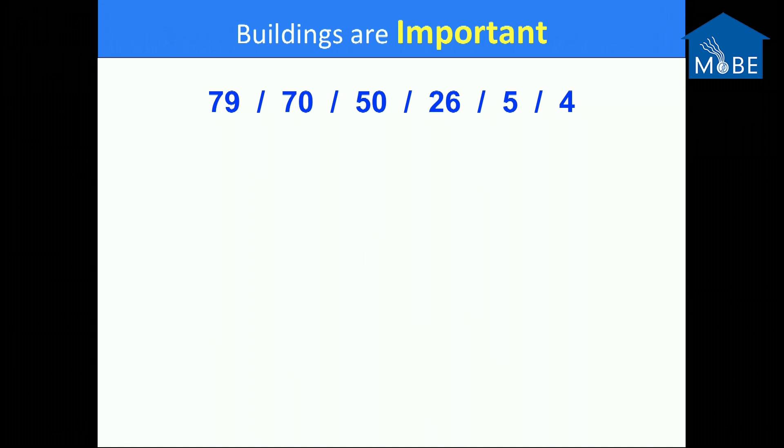So, some of you have seen me say this before, bear with me, but I'm not going to ask you what these numbers mean, I'll just tell you what they mean. Buildings are really important. The average American lives to be 79 years old. The average American spends 70 of their 79 years domiciled inside buildings. We spend more time, a greater fraction of our lives, inside buildings than whales spend submerged below the surface of the ocean. Think about that.

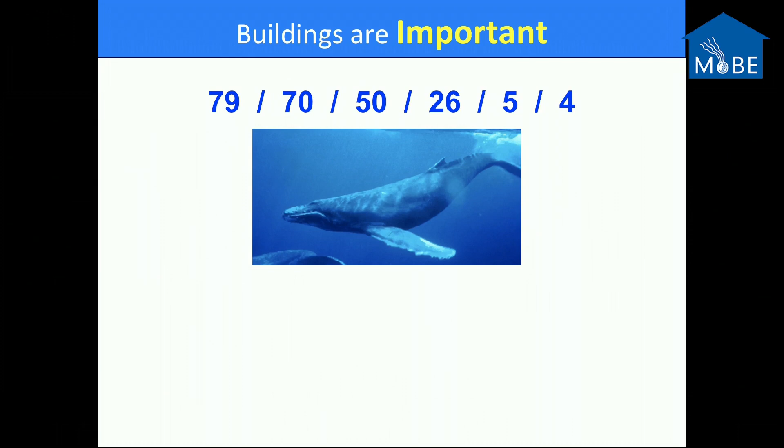Buildings are our ocean. We spend 50 of our 79 years in homes, 26 of our 79 years lying horizontally on a mattress with our face pressed up against a pillow, 5 years outdoors and 4 years in transit.

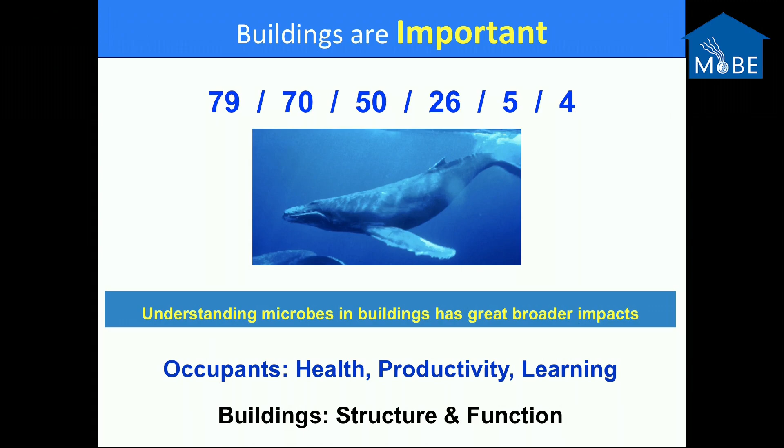So understanding microbes in buildings, I think, has great broader impacts. Definitely impacts the health of humans. We know that from hospital-acquired infections and lots of other things. Affects productivity, affects learning, but also affects the building. Rot affects structures, right? Biofilms growing on heat exchangers and HVAC systems affects the energy efficiency of buildings. So microbes do a lot to occupants as well as the structures of buildings.

Buildings are also complex, right? So I think Jeff Siegel said yesterday, if you take a measurement of temperature and relative humidity in a living room and you call that the characterization of environmental conditions in a building, you're just wrong. In fact, you should never get federal funding again if you say that. Buildings are extremely dynamic. Changes occur in buildings on the order of seconds when HVAC systems cycle on and off, to decades in terms of oxidative aging and other types of aging of materials.

They're heterogeneous, right? So if you just look at temperature on the plot up here, you have temperatures in attics in the summertime in Austin, I measure this in my own house quite frequently, up to 60 degrees Celsius. And you have supply ducts running through the attics with air in them at 13 degrees Celsius. Across less than a millimeter thickness of HVAC duct, a huge gradient in temperature. And you see that all over the indoor environment.

We see gradients in relative humidity, in illuminance, in daylighting, in materials, discontinuities in materials, in air speeds, in pressure across these spaces. And those pressure differences cause airflows that carry stuff from point A to point B. Daylighting's interesting. We get these steep gradients in space, but also in time, right? And if you've got a material that's in a lit zone with daylight, those materials can become very, very warm, especially if they're dark materials.

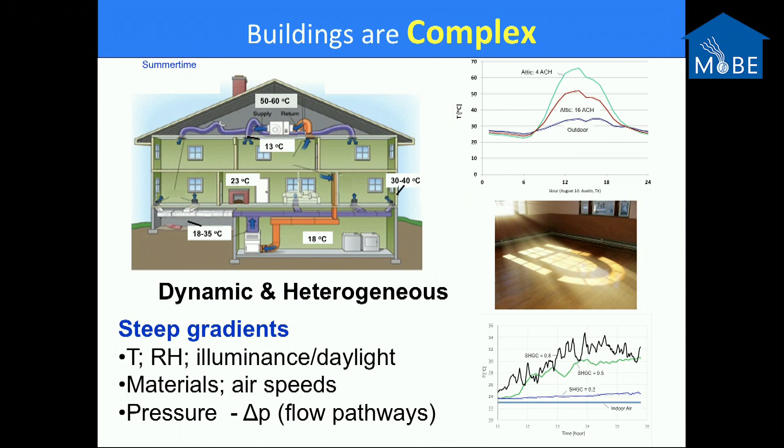Buildings are also deceiving. So I've done analyses of my own home. If I count the garage, the crawl space, the attic, and wall cavities, the unseen, or at least the unoccupied portion of my home is about the same volume as the occupied portion of my home. My entire home is about 50% unoccupied, right? So there's a lot of spaces in buildings that we don't think about because we don't see them. These unseen, unoccupied, hidden spaces, wall cavities, crawl spaces, attics.

I have a colleague, Attila Novoselac, J.P. Maestre, who's here, I believe, Kerry Kinney, who are doing interesting work in portables, and they see these small pressure differences, minus 2 pascals to positive 2 pascals, and they can see the microbiome of the attic being injected into the occupied space or the crawl space in the occupied space under negative pressures, and then you reverse that with positive pressures with really, really small pressure gradients, right?

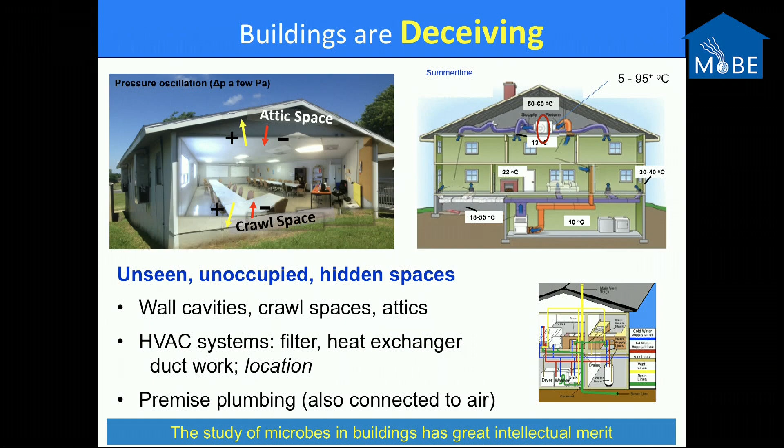HVAC systems are really understudied, in my opinion. There's lots going on in those systems, including heat exchangers that get up to temperatures of 95 degrees Celsius. So these are really extreme conditions in a building environment, and as low as 5 degrees Celsius. And then I'm not going to say anything about premise plumbing because I know that Amy's going to say that right after I speak. But the study of microbes in buildings, I think, has great intellectual merit just because of the complexity of buildings.

Buildings are prone to human mistake, and this is following up on something that Richard said about schools being pig pens or something like that. I don't remember how he said it, but I do a lot of work with schools, some pro bono, some research in Central Texas, and I see these kinds of design features.

See a lot of big external steel support beams with ceiling tile butted up right against them. There's 25 little humidifiers in every one of these classrooms that eject a lot of moisture to the air. And when this beam gets cold, very conductive surface, when the outdoor temperature drops, you get a lot of condensation on that cold beam. And when you butt ceiling tile right up against it, you get wet ceiling tile. And every single school I've seen that has this design has exactly that. We have growth right here along the external beam.

This is a school that has a downspout with a bunch of piles of leaves next to it and an air intake about 6 inches off the ground in this school. This school was closed for 2 years because of mold problems, and 2 teachers went to the hospital with respiratory distress. Cost about $5 million to remediate this building.

Here's a school that has a downspout that goes right into a drain that goes underneath the building. A colleague and I went underneath this building. It's a swamp down there, and the water was wicking up the walls, and this part of this building had to be closed and remediated. These are just dumb design features of buildings.

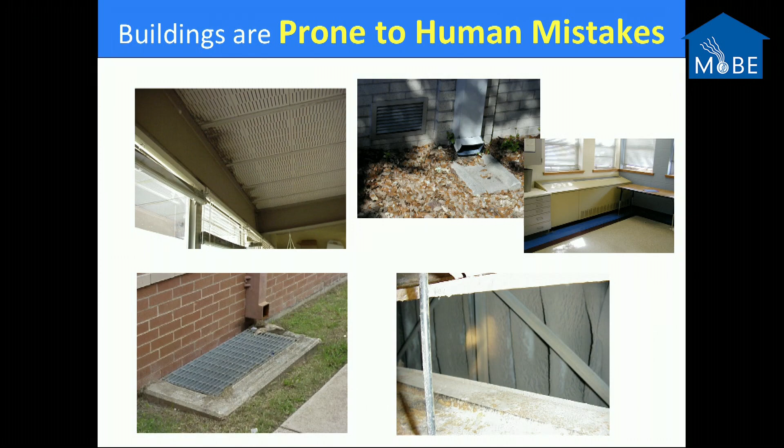Buildings are also prone to Mother Nature's wrath. We obviously have seen this recently. We're going to keep seeing it over and over again, and we're going to keep building buildings exactly the same as we always have. How do we deal with increasing intensity of storms that flood not tens of thousands of homes, but hundreds and hundreds of thousands of homes? Can we build and maintain buildings that are moisture resilient? At least from a building science perspective, this is a really important question.

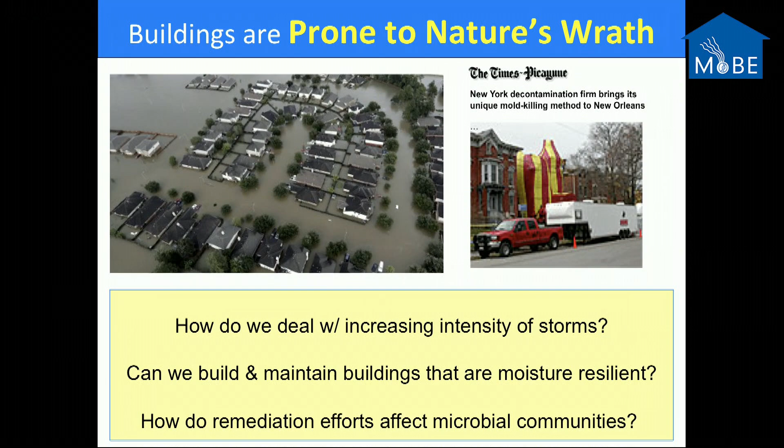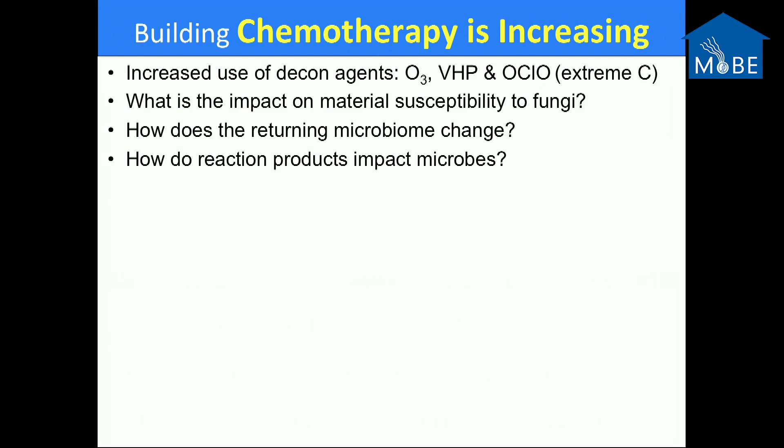And how do remediation efforts affect microbial communities? There's a cottage industry, maybe it's more than a cottage industry now, of companies that will come in after homes are flooded and remediate them. And one of the techniques they use for remediating is injecting really high concentrations of vaporized hydrogen peroxide, ozone, or chlorine dioxide into the homes. When I say high concentrations, I'm talking about hundreds of parts per million in the gas phase, not parts per billion, right? So really high concentrations of these compounds.

What's the impact of injecting these chemicals in terms of material susceptibility to fungi? So we have a little bit of evidence through some research we're doing at the University of Texas that when you ozonate bamboo at really high concentrations, it becomes much easier to grow mold onto bamboo.

But that's like one data point. How does the returning microbiome after remediation change? How do reaction products impact microbes? So my team's done a lot of work with these 3 decon agents, and we expose 24 different materials to these decon agents. We do a lot of replicates as well. And we look at what's formed when you hit materials with decontamination agents.

With chlorine dioxide, we also see a lot of haloketones, and they're the same kinds of things you see when you disinfect water with chlorine dioxide. So we're seeing chlorinated propanone, for example. We also see evidence of corrosion on metal materials when we inject chlorine dioxide into buildings. We put copper-coated slides in our chambers when we do these experiments. We can see corrosion of the copper-coated slides.

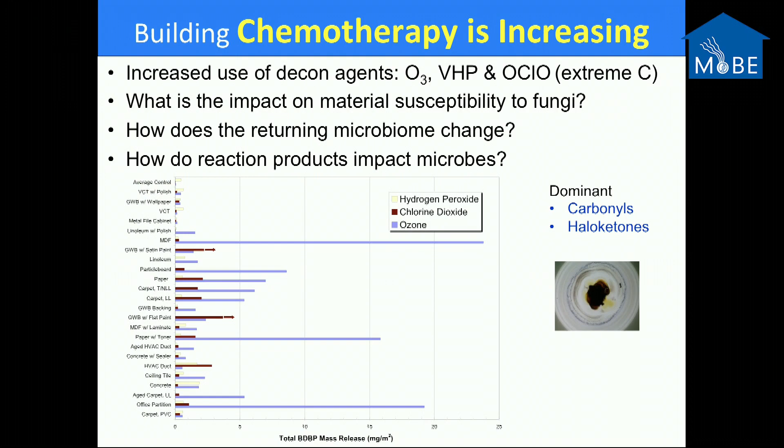So there's a lot going on in the building when you inject these chemicals at really high concentrations to try to remediate the building. Something to think about for the future. Building materials also transform dust. We tend to think of materials as substrates, right? Things grow on materials. Materials also transform things that deposit on them. Many materials contain semi-volatile organic compounds, plasticizers, flame retardants, perhaps some fungicides. And those materials are emitted very, very slowly from the material.

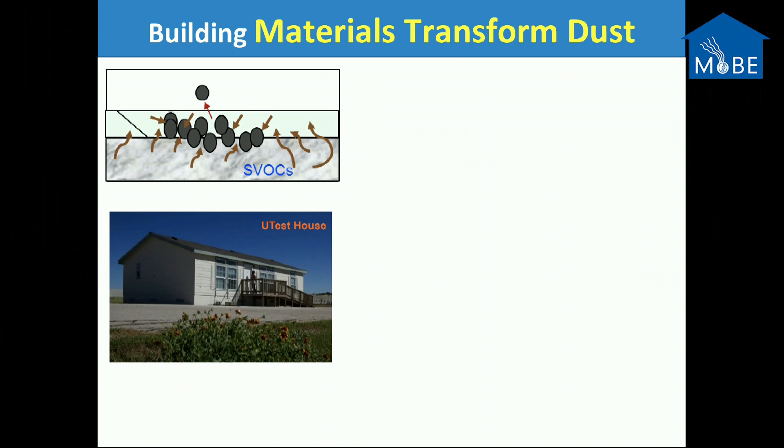And next to any material that contains these SVOCs, there's going to be a very thin boundary layer, about the thickness of a skin of an apple, but certainly greater than the diameter of most particles that deposit on them. And so you have very high concentrations of SVOCs in the gas phase right above the surface. Any particles that deposit on the surface can have these SVOCs partition into them, especially the organic phase of the particles. So imagine that there's bacteria and fungal spores, et cetera, that are part of that dust, which we know happens. What happens to them in that rich SVOC environment?

Right? So a colleague of mine, Ying Xu, has been doing some research in the University of Texas test house, which is a 1,200 square foot, 3-bedroom, 2-bath test house. Ying's group has characterized the composition of so many of the materials in our test house. It's the most characterized, I think, house in the country. But the floor is the only place where you find butyl-benzyl phthalate. It's used as a plasticizer on the floor. It's something like 20% of the floor mass. It's a huge fraction, but that's very common, actually.

So when Ying's group, her students, collect floor dust and then dust from all the other surfaces inside the test house, these are the kinds of results you see. This is butyl-benzyl phthalate concentration in dust in micrograms per gram. So for the floor dust, we're up in the order of 2.5 milligrams per gram. That's a really high concentration of butyl-benzyl phthalate, right? This plasticizer in floor dust.

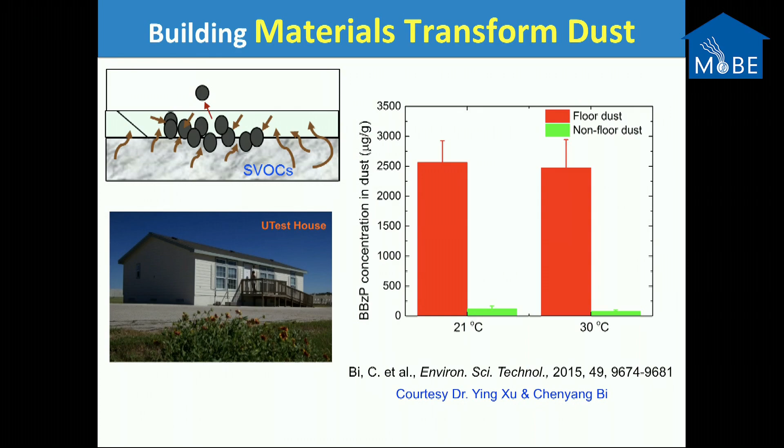And we know that there's microbes that are wrapped up in that floor dust, as Jessica spoke about yesterday, all right? So what does the butyl-benzyl phthalate, or any of these kinds of compounds that we see emitted from indoor materials, do to the microbiome of dust? I think that's a really interesting question that hasn't really been probed by anybody.

Building a research future. So this is my slide from a building science perspective. This isn't a new journal, building science perspectives. This is from a building scientist perspective, what kinds of research would I like to see done involving microbiologists, right? So one is to do more to study unoccupied spaces in buildings and the connections between the unoccupied spaces and the occupied space.

I think a much deeper analysis of HVAC systems where you can have spot condensation in supply ducts, you have these extreme temperatures on heat exchangers, you have biofilms growing on heat exchangers. I know that there's been some great research that's been done in the past. Bill Bahnfleth has done work on biofilms, Jordan Peccia, and I think Jeff Siegel are doing some work in that area right now. So that's really promising, but I think we need more work in that area.

I think more research on remediation effectiveness. Carl Grimes asked yesterday, when do we know we're done remediating a facility, a building? So that's a good question, right? And also, what happens to the microbiome after we remediate? Especially the microbiome that grows back in the building. Is it different than the one that existed before we remediated?

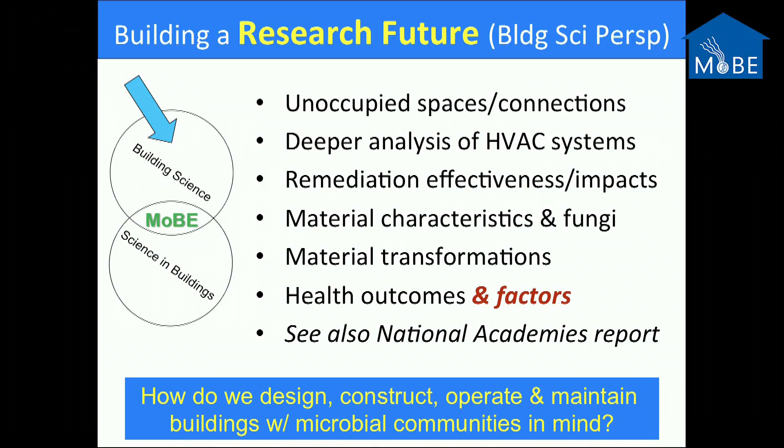More research on material characteristics. We know so little about the physical and chemical properties of materials in buildings. The morphology, the composition, the porosity, and so on and so forth. And interactions with fungi and how those characteristics affect fungi and materials. Material transformations. I would like to see us think over the next 10 years about how we transform the interiors of buildings to make materials work for us instead of materials always being the enemy that things grow on.

Obviously, everything we do is related to health outcomes, almost everything we do. And I think as we move forward into the health arena, I hope that we keep in mind not just the microbes that might be causing health effects, but the building factors that are affecting the microbes that might be causing health effects. The National Academies report that I think Joan Bennett will be talking about in a little bit actually has some additional recommendations in it, including building science recommendations, and I encourage you to read that. Right? So I think ultimately the question is how do we design, construct, operate, and maintain buildings with microbial communities in mind? And as a building scientist, that's what I hope we do.